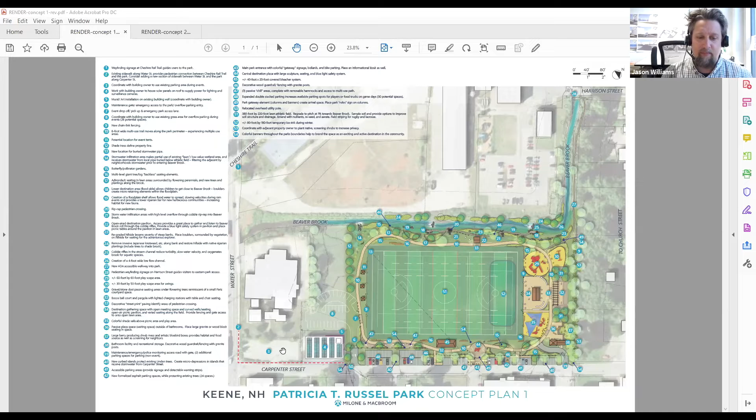We also identified that we would need a new sidewalk connection for accessibility that runs along the corner here of Water Street and Carpenter Street. As we get down to the lower left here, you can see identified number 3, in which we would be proposing some coordination with the existing building owner to use this parking for overflow parking during events or game days. Let me zoom in here a little bit.

As we make our way from this overflow parking, we're proposing to, again, work with the existing property owner on this existing structure to add photovoltaic cells to the roof so that we can include some of that energy for lighting, as well as security cameras if need be. Facing the field here, as you can see in pink, there's a large blank wall that would make a really great location for a potential mural on this building. Would require some additional coordination with the property owner.

As you're coming up Carpenter Street, there's an existing telephone pole here. This is where we would really start to introduce our gateway and branding signage on that pole that you're entering Carpenter Field and the park. We have a new entrance, which is just on the southern side of the property line, which takes us into what would be additional coordination with this property owner for potential overflow parking. I believe there's approximately 23, 25 spaces within this lawn overflow parking area, but obviously would have to be coordinated with the owner.

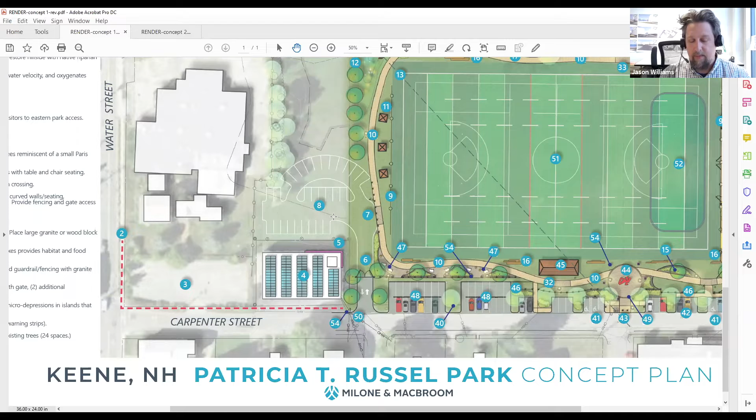As we move along Carpenter Street, we have formalized some of the existing parking, keeping some of the existing linden trees to remain, which are identified with this kind of transparency green color. And within those areas, we would be adding curb and infiltration, small rain gardens in these areas. To increase overflow parking, we've included a double stacked parking area. Ideally it would be used for players on game days who would be okay with being blocked in if they're teammates. Ideally, the front half of this could be gravel so that on non-game days it doesn't look out of place, just being asphalt. Then all of the other parking spaces along Carpenter Street would be asphalt, pitched into these open rain garden areas with high level overflow structures that would then go to the storm drain.

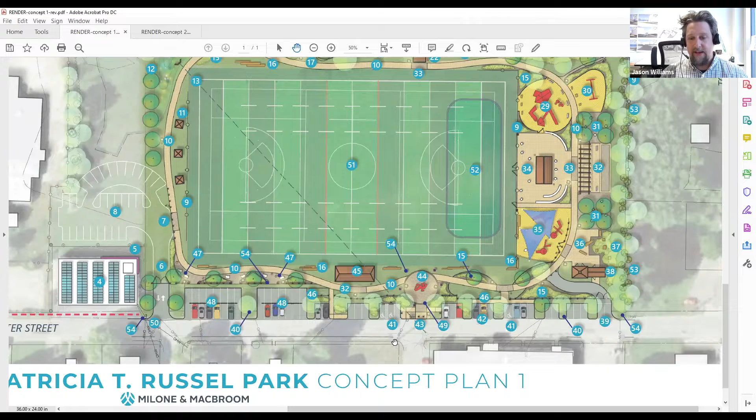One of the elements of this project is looking at the existing underground storm pipe that currently runs straight out to Beaver Brook. In this concept, we would be capturing those storm pipes and relocating them to the southwest here, to the lower end of the field, and creating a sediment basin for these, which would also be a site feature planted with meadow grasses and native perennials with a small cobble overflow that then goes into Beaver Brook. This pipe, as you can recall, takes on a significant amount of stormwater from the adjacent neighborhood to the east. So we'd be providing this stormwater element so that we can help with water quality and treat some of that.

So at 43 here, we have our main entrance into the park. We would have bollards and drop curb for handicap accessibility, existing hydrant, I believe, to remain. This would be a location for bike racks, and just adjacent to that would be our handicap and van accessible parking areas.

If we move from this area to the west, we move into a large plaza space. In this plaza space, we envision having a large sculpture, as well as benches within the potential paver plaza. And then identified as 54, we would have a series of columns or colorful banners that create that backdrop to the sculpture, and with some movement those banners would bring some life right as you're entering into the field.

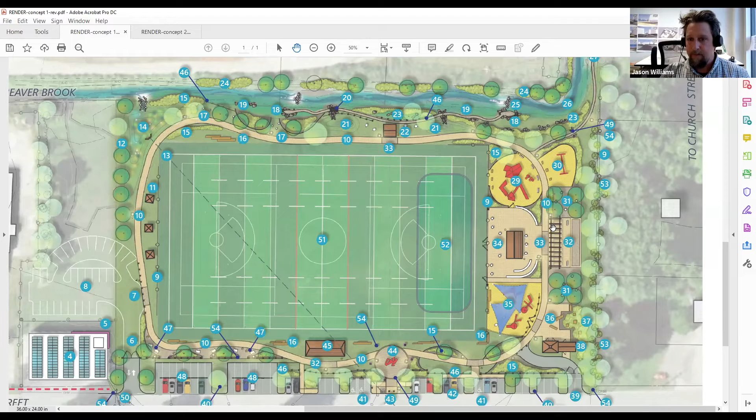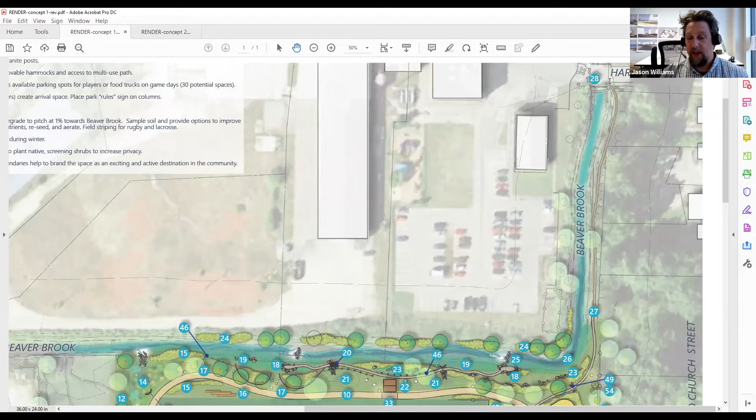If we move up the page a little bit, we are proposing a new pathway to run just to the north here and pick up the existing location of the existing trail, which makes its way up to Harrison Street. At the Harrison Street bridge, we'd be proposing signage for the park that identifies that you can take this pathway, which would be paved ADA accessible, and would potentially identify not only wayfinding to the park, but this could be a location for park rules, letting people know immediately what is allowed and what is not allowed in the park.

One of the things that we identified as part of our site visit was that this area here is heavily used for potential, you know, not the best activities, as we've talked in the past. So we would be proposing a new fence to block off the link, which runs from 49 out to Church Street. There's an existing pathway here. So the fence line runs along the entire north property line.

Now, we've got some pretty interesting stream channel features that we think are really going to be improvements. Currently, as you are probably aware, the stream channel runs down and just makes an immediate beeline to the south here. And so this bank here gets a lot of velocity and impact to it. And what happens is it doesn't do any benefit to the stream channel. As water is slamming down here in floods, it's taking this right-hand turn and continuing on. And so we want to do a couple things.

We want to slow down that water, and we're doing that by regrading this area to create a micro floodplain. So the grading comes all the way out to here and comes all the way back here. So all of this area in here is essentially maybe 12 inches above the existing water elevation, so that during floods, we're kind of relieving some of the pressure and allowing these floodwaters to spill out into this area. But we still want to provide access down to it.

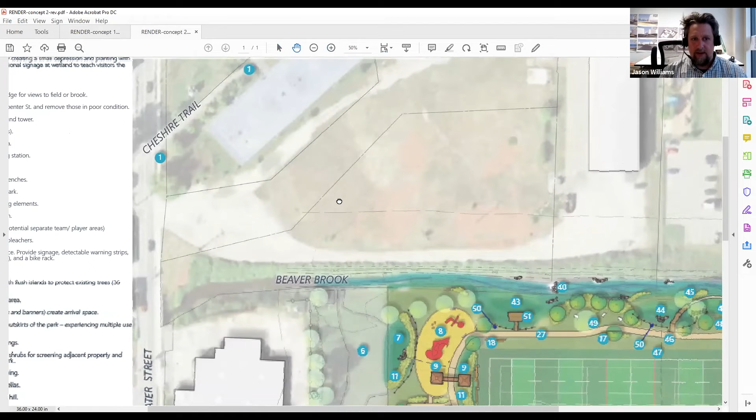Okay, in concept number 2, we are coming in again and we're saying desired signage, wayfinding signage at Cheshire Trail to make people aware that they can have a very easy walk down Water Street and Carpenter Street to get to a new parking area on our property. We'd be using the similar location coming just in off, where we would have 2-way flow moving in our main drive aisle here, going to a 1-way flow, wrapping around and coming out.

In this concept, we could potentially have the area paved with asphalt or pervious asphalt, and then have pervious pavers in the parking area. So we kind of add an added stormwater element to this parking area, and we're just not proposing impervious surface into what is currently lawn.

Once you park and or are dropped off, you enter 2 small little plaza areas. So these paver plaza areas would have benches in them. They'd have trees for shade just over them, and would be a great place. It's a decision node. So if you get dropped off, you step onto the plaza, and really you're panning around the entire park, figuring out, oh, where should I go? Where's the playground? Is John here yet? Let me text him. It's kind of the decision area.

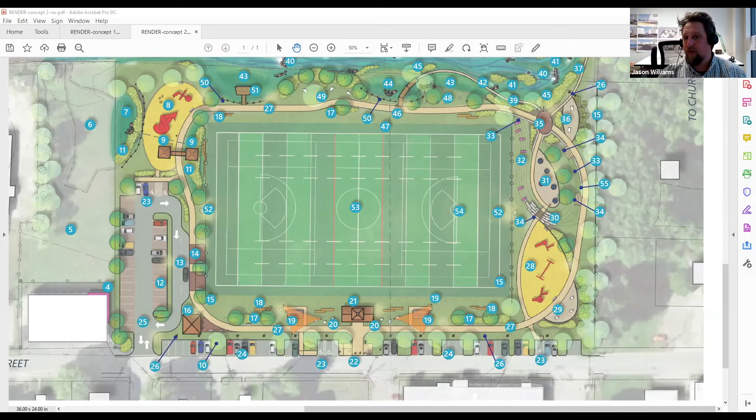On the back side of this, again, this is sloping down towards our walkway. We have shade trees planted and a series of steps that get you down to the walkway, which wraps around to number 35, which is our entrance node.

When coming from Harrison Street down, this is your first identification of the fact that you're in the park, signage of what the rules are in the park, and what are the different elements that you can visit in the park. So we envision a kiosk here that would have a map that identifies all of the different things in the park.

36 is a small little gathering space where we could have potential hammocks that people can sit on. The hammocks could also be put up only during game days, taken down so that we don't have people sleeping through the night on these hammocks.

And then this concept, we're doing some similar features in the stream channel by really taking this grade back and creating some of our micro floodplain areas, but we're modifying the low flow channel a tad. We're maintaining the existing low flow channel as it moves through, but we're doing some scarification to it. So we add another small channel in here, another small channel in here, and another small channel in here.

By creating those smaller channels, we're creating number 41, which are these small little islands. Now, for the most part, depending on the elevation of these islands, they could be underwater for the majority of time with just a little bit of a knoll with grasses on top of it sticking out of the ground. During low flow, the channels would be exposed, and during high flow, you wouldn't even see these islands.

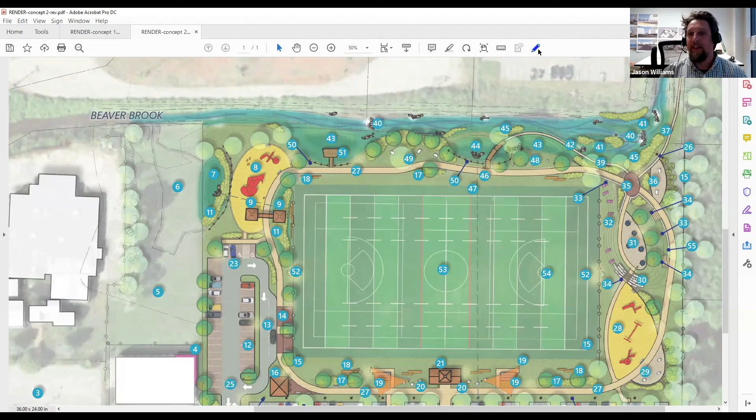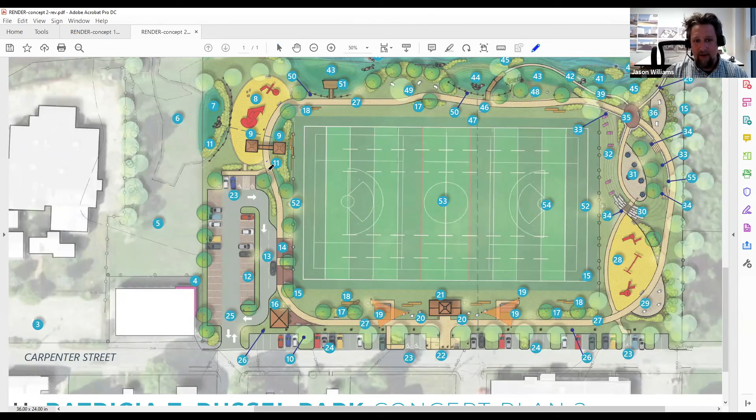And as Andy said in one of our earlier conversations, in fact, you as the homeowner can have one of these rain gardens at your house next to your driveway so you don't have that irritating flooding or erosion that is happening in your yard. Our walkway moves down, and you can envision walking underneath this bridge, looking back up with kids running back and forth, looking down, shouting down, and a walkway to accessible parking here.

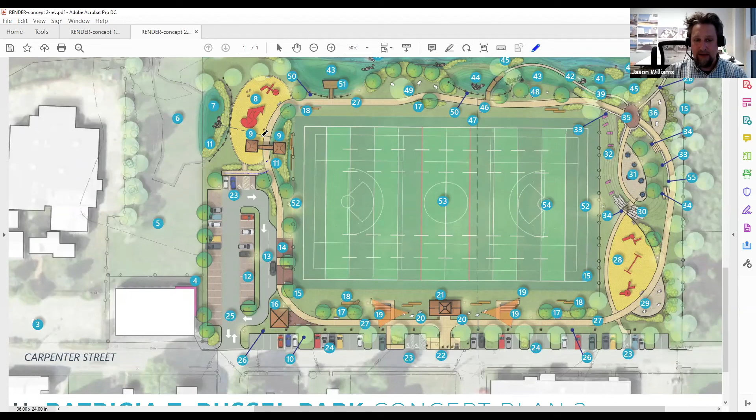What's nice about this is if it's a cold day, if it's snowy, nothing is happening on the field, it's a great place, and the kids want to go onto the playground. Very easy parking, very easy ADA access right to this playground here. And then our path moves down to our plazas here. And that's concept number two.